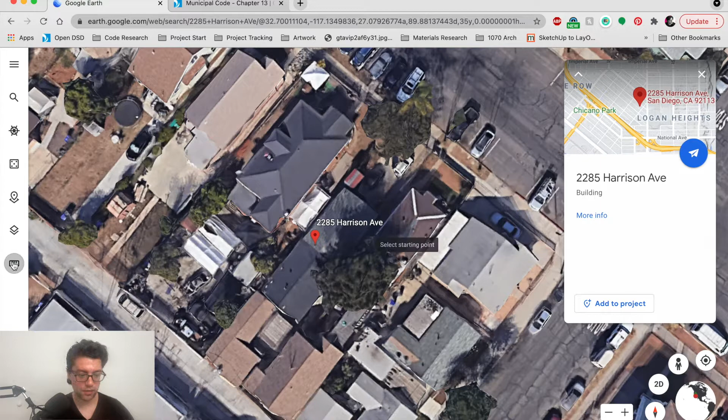First I want to explain the lot conditions that our site has. Our property is located in Southeast San Diego in the Diamond District of Logan Heights. So it's right here on the map. I'm using Google Earth. This is a great tool, because it has this nice little measuring tool, and we can use feet here.

I want to explain a couple things about this lot because it is a little bit of a strange lot. We have a pre-conforming duplex on this lot. This roof right here is Unit A, a 1-bedroom, 1-bathroom unit, which has been completely remodeled in 2016. Unit B is right here, built in 1985, a 2-bedroom, 1-bathroom unit, which has also been remodeled. But the unit in the back here is not my property.

Our lot was subdivided from this larger lot. Our lot extends 100 feet and 25 feet in this direction. So it's a rectangle, but it does not include this back 40 feet right here. This part of the lot here is owned by our neighbor who owns this entire L-shaped lot right here.

Because our lot does not have alley access like all these other lots do, we are one of the only houses on the block which have a curb cut for a driveway. So all of our parking is handled right here in the front. The other thing you'll notice is that all of these homes are set back further or set back less from the street than our home.

Our home is all the way back here, but all these other homes kind of follow this line across here. That means we have this extra space here, and that's where I wanted to position the accessory dwelling unit. Our lot is a total of 2,500 square feet, and the ultimate goal here was to get 3 units in that 2,500 square feet.

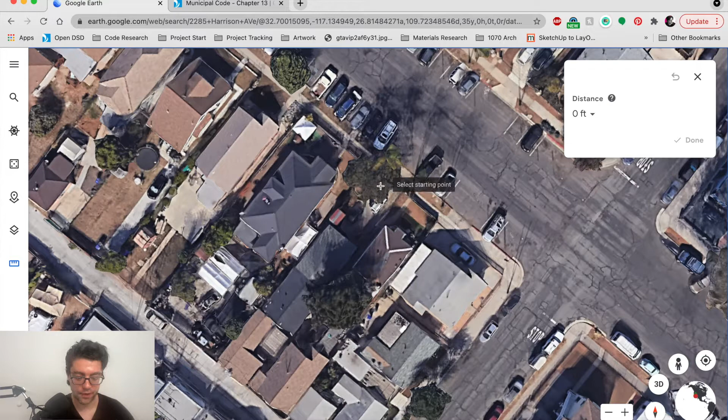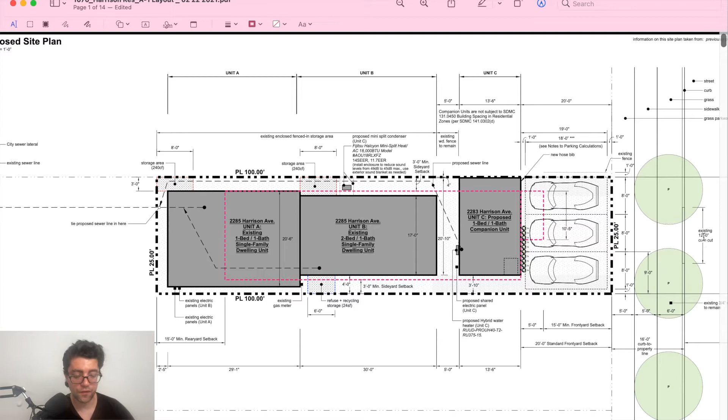You can see that this is the street over here, and we have indicated an existing 12-foot curb cut, so that's how we get into the driveway. You can also see back here is the alley, and our sewer line comes through our neighbor's property and then reaches the alley.

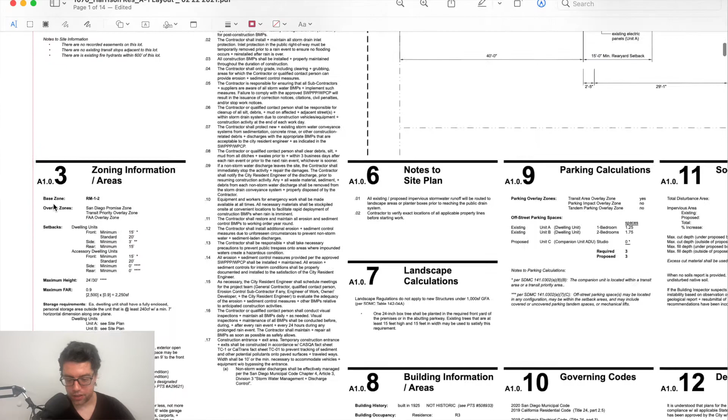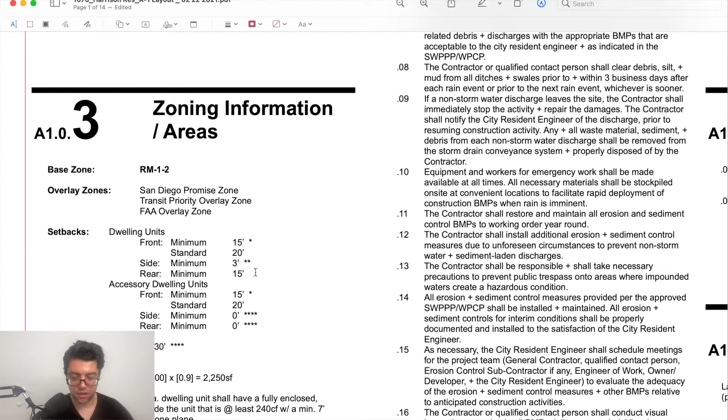Now for setbacks, we have this little section on our cover sheet where we talk about all of our setbacks. Our dwelling units have a front minimum setback of 15 feet and a standard setback of 20 feet. The side setbacks are 3 and the rear setback is 15. If I go back to the site plan over here, you could see this magenta line indicates those setbacks. We have a 3-foot side yard setback, indicated right here, and a 15-foot rear yard setback, indicated right here.

I'll talk about the front setbacks in a minute, but you'll notice that this back unit encroaches quite a bit into this 15-foot minimum rear setback. This is considered a pre-conforming condition, and when we propose this accessory dwelling unit, we're not going to be responsible to correct that setback. This home was actually built in 1925, before the lot was subdivided, and before any of these setbacks were in place.

Unit B actually respects the setbacks quite a bit more, and this is stepped back about 4 feet from the property line. The reason that there's a front standard setback and a minimum setback is because this is how that's applied to the lot. Your minimum setback can be 15 feet from your property line, and that's allowed to be the width of half the distance of your structure.

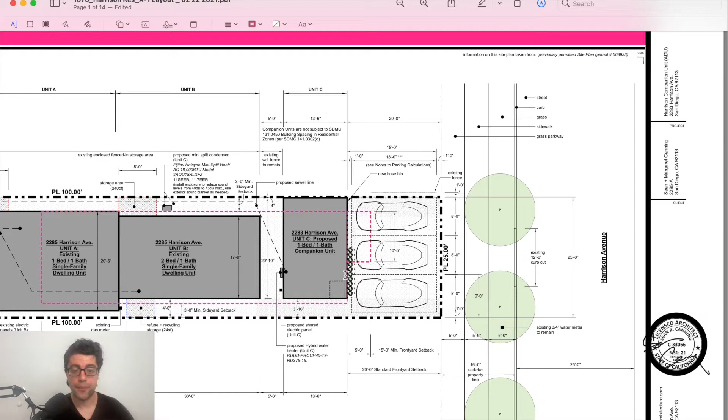Now, we chose not to build in this setback because we had to make sure that we were able to keep these 3 parking spaces. Why do I have to keep these 3 parking spaces? Well, not only is parking a nice amenity for any renter, or for any owner for that matter, but the city has a requirement for parking for dwelling units. And we have 2 units, Unit A and Unit B.

Unit B is a 2-bedroom, so it requires 1.75 parking spaces. Unit A is the 1-bedroom, so that requires 1.25 parking spaces. So in total, we're required to have 3 parking spaces here.

What about the parking for the accessory dwelling unit? Well, accessory dwelling units require 0 parking. You may see the term companion unit in this set, and that's because we made this submittal when the City of San Diego was still using both terms interchangeably. Currently, they only use accessory dwelling unit and junior accessory dwelling unit, so you will not see the term companion unit anymore in San Diego.

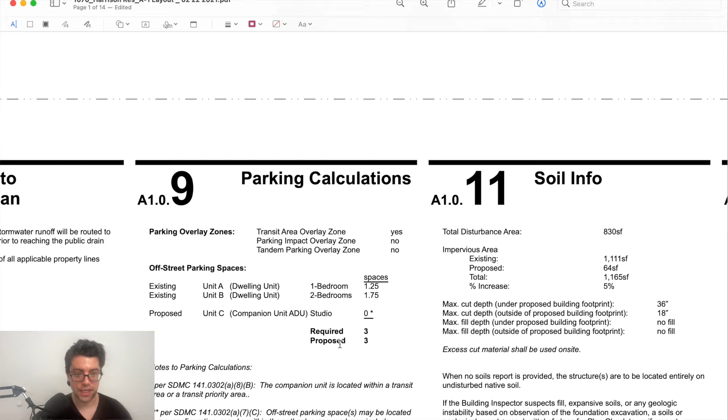Unit C does not require a parking space, but these 3 are required to verify Unit A and Unit B. If I can't get 3 parking spaces here, the city is going to tell me I can't build this. So it's very important to plan ahead for this.

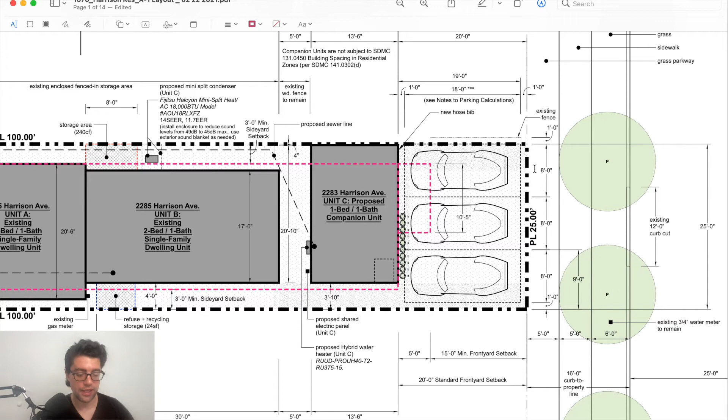A couple other things about parking you need to understand: there is a minimum width and length dimension. So even if you have a Fiat, like I do, you still need to provide an 8-foot wide by 18-foot long parking space. In certain cases, you actually have to provide an additional foot if you have an existing fence or you're going to park adjacent to a structure. And if you park in a garage, you also need to add an additional foot to the length.

One more thing about parking: previously, before we proposed this, all of our parking was shown in the front here. We know that because we have the permit set of drawings submitted for Unit B when it was built in 1985. What I think happened is that Unit B is set so far back because they couldn't park in the front yard setback under the previous municipal code regulations. So all of the parking had to occur here, which is the way it was drawn on the site plan.

If you're not building an accessory dwelling unit, you still need to provide parking over here. You're not allowed to park in the front yard setback. However, once you build an accessory dwelling unit or a junior accessory dwelling unit, you're now allowed to park in the front yard setback. So that's the condition we have here. 2 years ago we wouldn't have been able to do this, but now the municipal code has changed to allow for easier parking regulation to add more housing to San Diego.

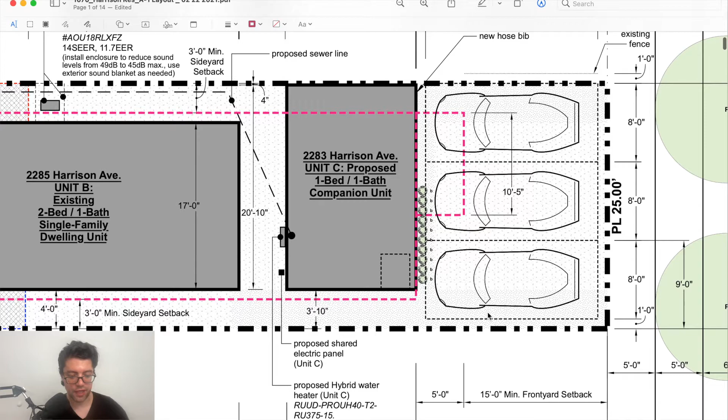The second thing we want to do before we plan the location of this: we know we're limited to the front yard setback, but we can encroach into the side yard setbacks like we have shown here. However, we're not showing it here, and there's an important reason for that - we have to consider how all of our tenants or tenants' guests are going to access these units.

Unit A's entrance is here on this side, and Unit B's entrance is right here in the front. So what we're planning is that all of the tenants would park here and enter through a side yard, just the way Unit A is entered now, same way Unit B is entered now, but it would come down in here, and then Unit C would enter from the side right in here.

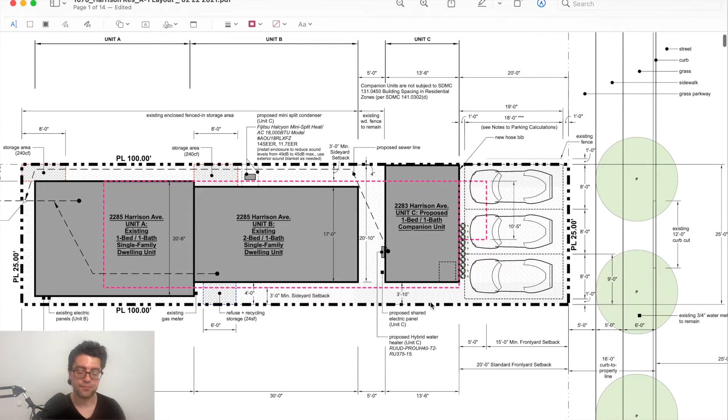This preserves all of our parking, and we just have to leave a little bit of space here so that we can bring in furniture for a tenant, or maybe replace a refrigerator or a washer dryer in the future. So you really want to leave at least 3-foot clearance, and that's 3 feet 10 inches from the property line. If you build a fence, it's going to be a little bit more narrow, so the absolute minimum you want for this passage is 3 feet.

Okay, let's jump into this design here. So just to orient you guys, this is my street, the alley is back here. This is Unit A, this is Unit B, and this is the footprint where we're planning Unit C.

Now, if we keep Unit C detached, we're going to have an easier time permitting this. If we were to attach this, it would create a triplex, and a triplex structure would bump you into an R2 occupancy classification, which could trigger mechanical, electrical, and plumbing engineering. We didn't want to do that because we wanted to really keep the cost low.

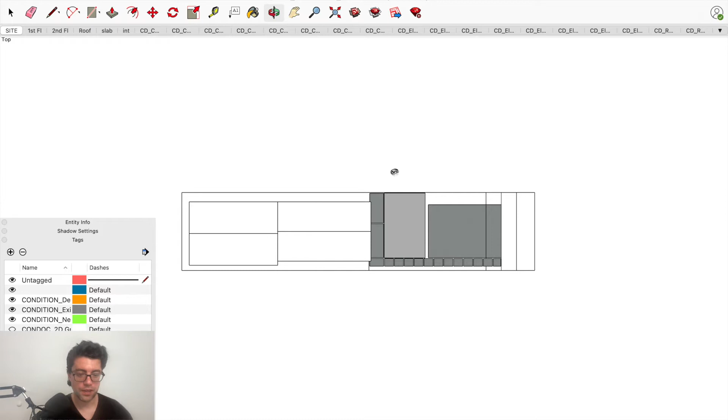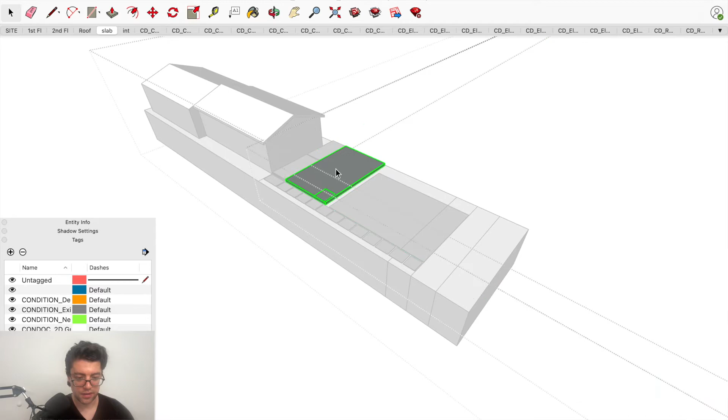So what you're seeing here is the driveway, the walkway we just discussed, and 2 patio slabs - one for Unit C and one for Unit B, which they're going to use to enter here. This is the entranceway for Unit C, and this is also the footprint for Unit C. If I click into this, you can see that's the footprint, and that's where we're going to locate everything.

So the width we have to work with here is just about 13.5 feet by about 21 feet, just under 21 feet. So 13.5 by 20 feet 10 inches is the actual finished exterior wall to finished exterior wall dimension, if you're considering this model for your own property.

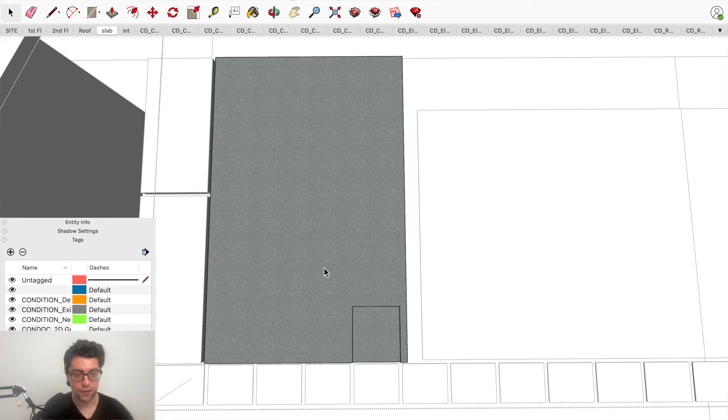Okay, so I'm going to turn this back on. Here's a slab.

I should mention, why would I build a slab instead of a raised foundation? There's pros and cons to both. I prefer the slab because it doesn't have an unventilated crawl space.

If you have a crawl space, your first floor is going to be up a little higher, requiring more stairs to enter the unit. In a heavy rainstorm that may be beneficial, but when space is very limited, we're going to build this slab about 8 inches above finished grade. That should be enough to prevent precipitation from getting in, but it also means I don't have to have more than one step to enter the unit. And clearly we just don't have the space for some sort of porch entry.

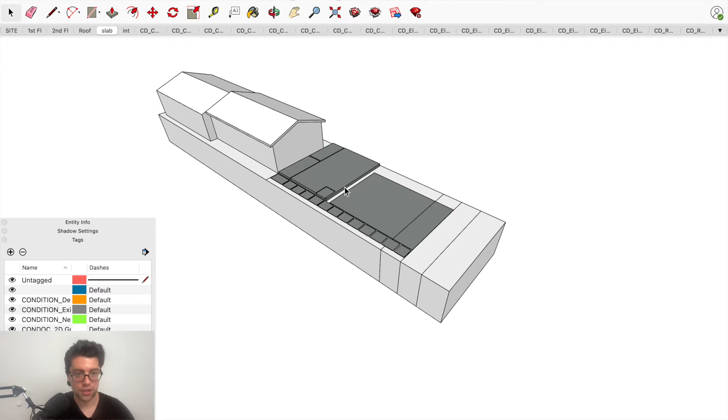Okay, I'm going to turn on the first floor. This is a 2-floor structure, so we did plan to go 2 floors. The first decision we had to make was where the bedroom and bathroom were going to be in relationship to the kitchen and living room. The bedroom and bathroom are considered private spaces, and the kitchen and living room are considered public spaces.

The bathroom is kind of a hybrid, because your guests will use the bathroom. A good way to consider this is if you were to have a party, the public spaces would be where you'd want your guests to be, and the private spaces would be areas of your home where you'd find it very strange to find a guest. So the bathroom kind of serves both purposes, public and private.

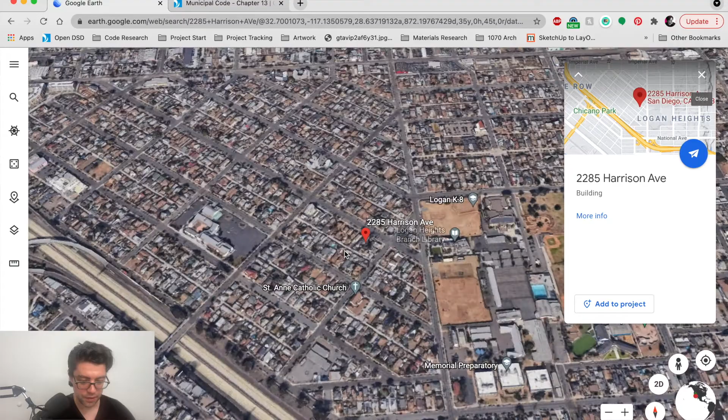So we do have a couple interesting conditions on the site. For one, we have this amazing view of the bridge if we can get up onto the second floor. We know this because we've been climbing on our roof to verify that we can get that view. And sure enough, we are able to get that view as long as we can get up to the second floor. So that was one of the conditions we really wanted to meet here.

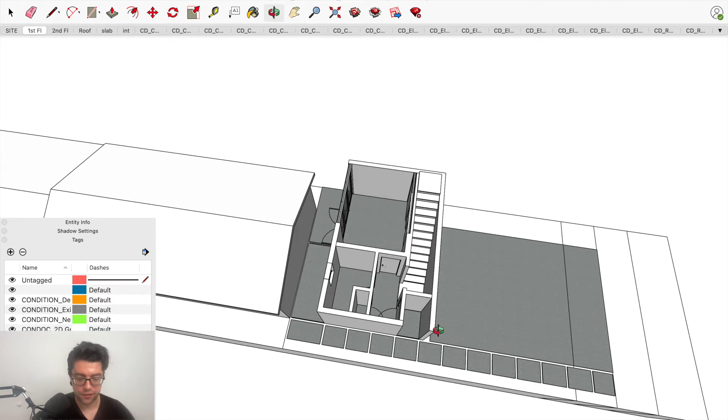The second condition is we're going to have this entry here because we've already established this is the most efficient path to access these units. That path should generally be a straight line. Anytime you're going to have an L shape, it's going to be a little less efficient. We do have a little bit of an L here, but anytime you can get this in a straight line, that's preferred.

So the next thing to consider was once we enter into this little foyer space, you want to be able to take your guests to the living room as fast as possible because you want an efficient floor plan to fit in something this size. We are about 550 square feet total across both floors here.

So this is the bathroom right here, and this is the bedroom. The reason we decided to put the bedroom on the ground floor, there's really 2 reasons. First, we wanted to preserve the view for the public spaces so that guests can experience the Coronado Bridge at night when it's lit up. It really looks beautiful from our living room.

The other decision was because we wanted to put the bedroom and the bathroom on the same floor. I think this is the most important decision we made, because in the middle of the night, if you have to use the bathroom, you don't want to walk up or down a flight of stairs. So that was very important.

Okay, so we do have the bedroom here, we have a closet under the stairs, and we have the stairs in the front of the home. The reason we did that is because as people pull in to park their cars, they're going to have their headlights on and they're going to be slamming their doors. So we wanted to create as much buffer from the bedroom and the living room space as possible. That's why we located everything here.

The bedroom width is basically 9 feet wide. This is the absolute minimum I would design a bedroom in a 1-bedroom home. This is just big enough to fit a full-size bed on this wall and have about 18 to 24 inches to circulate around the bed. So I don't think I would go any smaller than 9 feet.

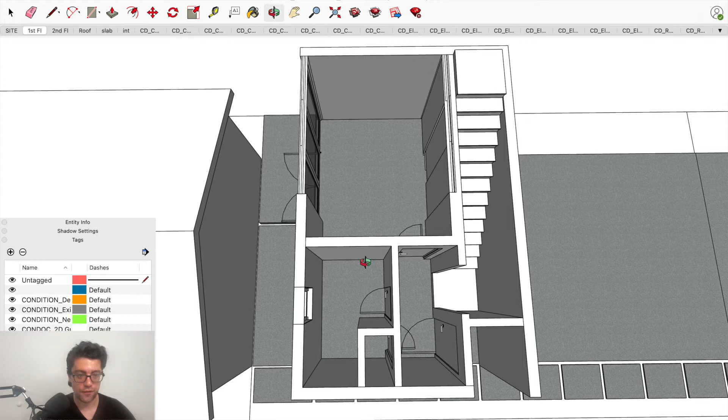This is just about the smallest bathroom you can design. We have a 36 by 36 inch shower. We have a toilet which requires 2 foot 10 inches of clearance space, and then we have a 24-inch floating sink vanity. We also ran our medicine cabinets all the way across the wall to give ourselves some additional storage space.

The last thing I'll mention is we have this coat closet over here, so you can put your shoes or take your visitors' jackets and put them in that closet. We'll also probably store our vacuum cleaner in this closet.

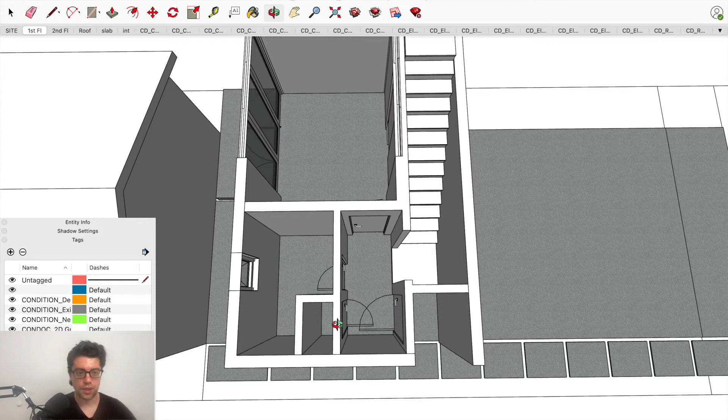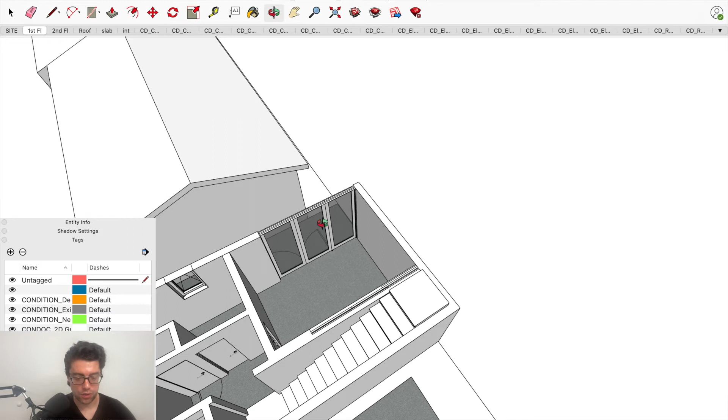And the bedroom is positioned so it has a private patio right here. Both of these doors open, and this door is fixed, so that's a 9-foot wide by 8-foot tall door. This is one of the more expensive components in the project, and if I was going to value engineer this, I would probably reduce this to a 6-foot wide sliding door system.

This door system cost us about $5,500, and the total budget for the project is about $130,000, so it was one of the larger items we splurged on. The nice thing about this door system is we have that full 9 feet in width, and the clear opening is just about 6 feet because both of these French doors open.

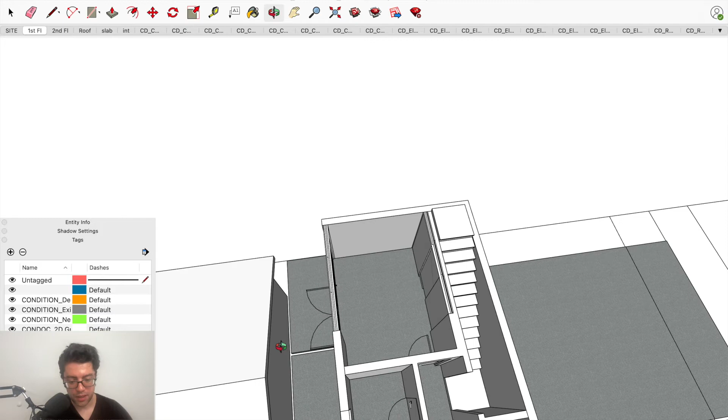By the way, this patio is going to have a fence around it, so it will be completely private from the entry for this unit, which is very important. We also have a washer dryer planned under the stairs over here, so this is kind of an upgraded unit.

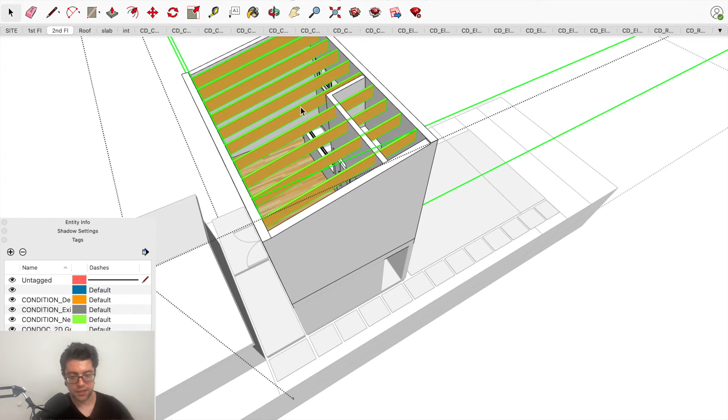Okay, here's the second floor. One of the things you'll notice across the board in the 1070 architecture portfolio is we really stress ceiling heights, and this unit is no different.

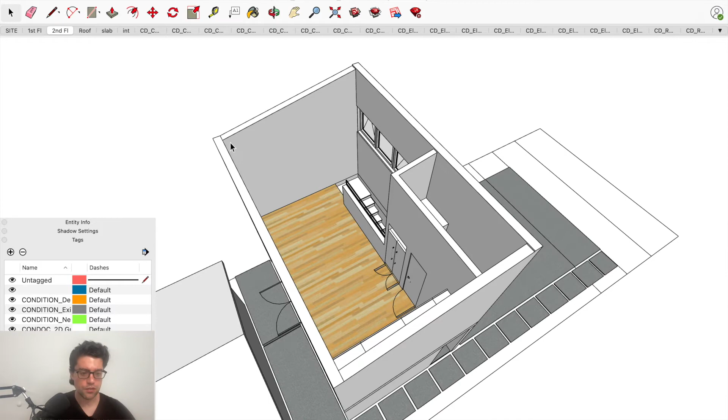I'm just going to hide this real quick. We have about 12 feet 6 inches to the peak here, and then the ceiling slopes back this way because it's considered a shed roof, which means it only slopes in one direction. It's a very simple roof to build, and you're going to experience that slope from the inside.

On the second floor, we have our living room space, and then we have a very small kitchen space here, and in between would be a dining table. Our thought is that the tenants would bring their own dining table, and they would be able to use that as an additional surface to prep food.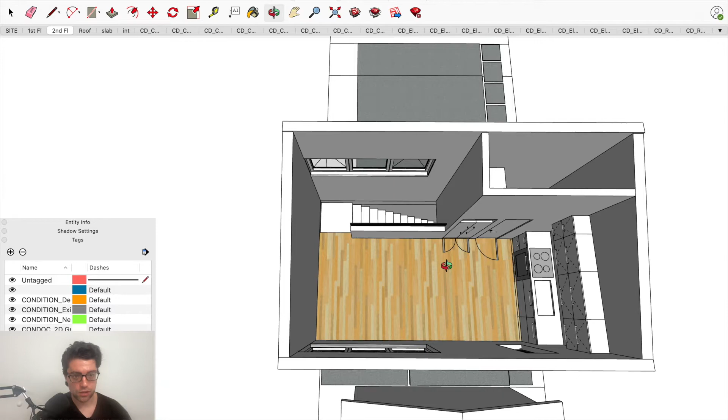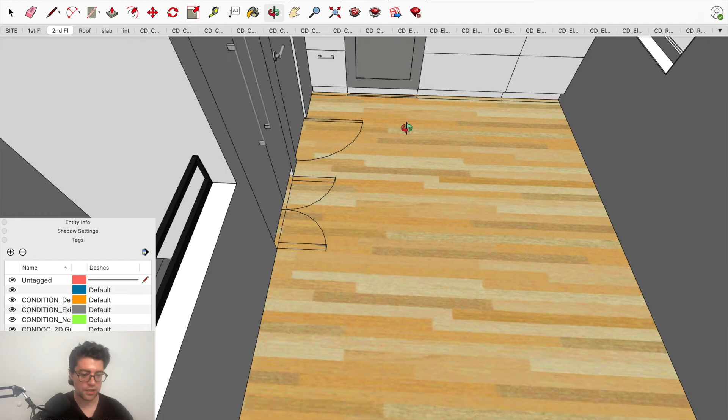This pantry over here has gone through a couple changes since we've created this design. Originally it was just supposed to be a pantry for food and dry storage and things like that. But as we were building this in construction, we actually decided to take a cabinet and countertop and extend it over to this area, so that will serve as kind of like a mini butler's kitchen, maybe somewhere between an appliance garage and a butler's pantry.

You'll be able to store your blender and toaster on the countertop over here. It'll be already plugged in, and you can use it in here, so you don't clutter your countertop over here. We're also going to have some shelving all the way up to the top, and the top shelf will be a router shelf because we're going to have some security cameras in the corner on the outside over here.

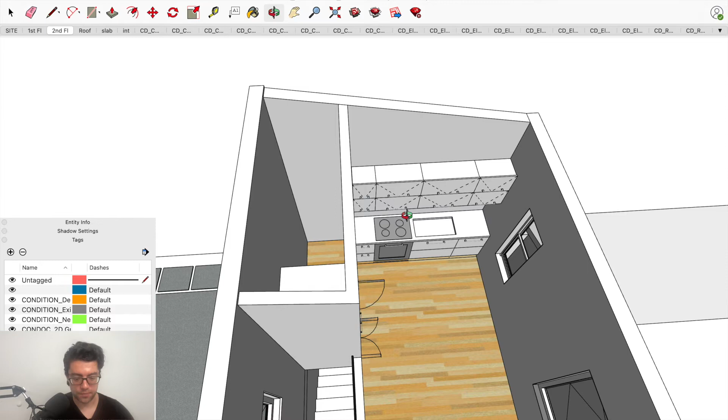It is a small unit, so storage is a huge advantage to have. On top of this refrigerator enclosure, there's going to be additional storage on here - that's the stuff that you would generally store in your attic if you had an attic.

So that's the second floor. I just want to talk about some of the windows here while we're at it. This is the window which is going to look towards the Coronado Bridge, and that's a nice casement, fixed casement window, so these swing open like a door would, and that's a great way to sort of catch some of the breeze off the bay and cool down the interior space.

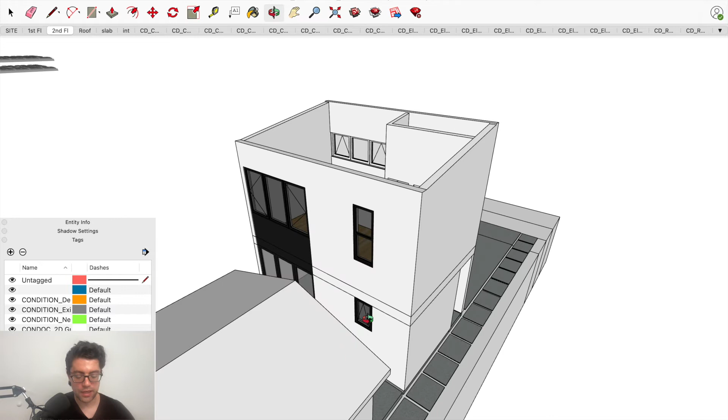Down in the bathroom we have an awning window, so this opens like an awning from the bottom up, and it doesn't encroach into this little entry patio for unit B too much, so that's why we went with an awning window. And that has privacy glass on it, so most of the time it will probably stay closed and you can't see through the privacy glass, so people in that bathroom will have privacy from unit B.

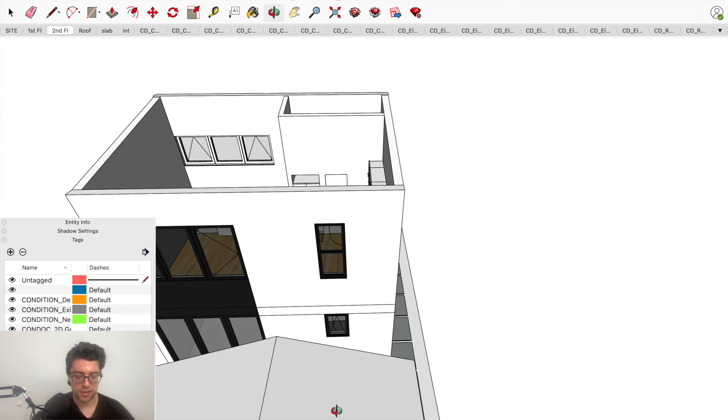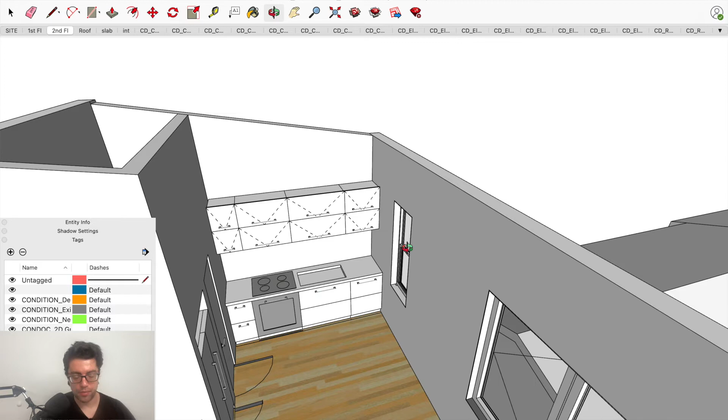This is a double hung window. I really like the function of a double hung window because you can pull the top sash down and sort of exhaust some stale air or some cooking smell, and since it's so close to the kitchen, I think that makes a lot of sense. You can also open the bottom sash and get a bunch of air in there, and you can open both at the same time if you wanted to create a circulation loop.

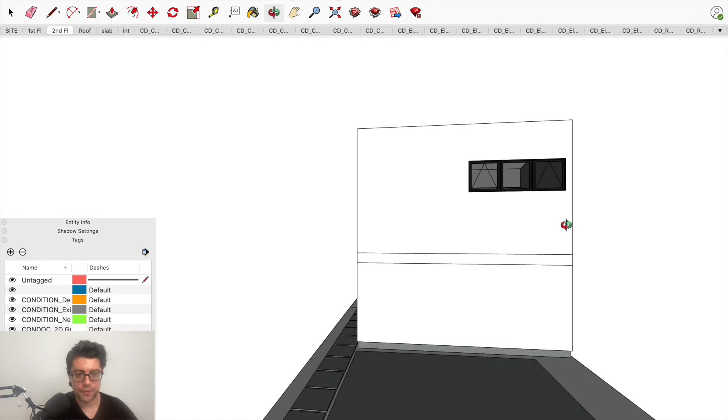And then this window in the front here, now we were required by code. Our goal was to create a very minimalist front aesthetic. We were required by code to have one window in the front. I don't like it when the code requires things like this, but we were able to satisfy that requirement with this large window here. So this would count as like 3 windows.

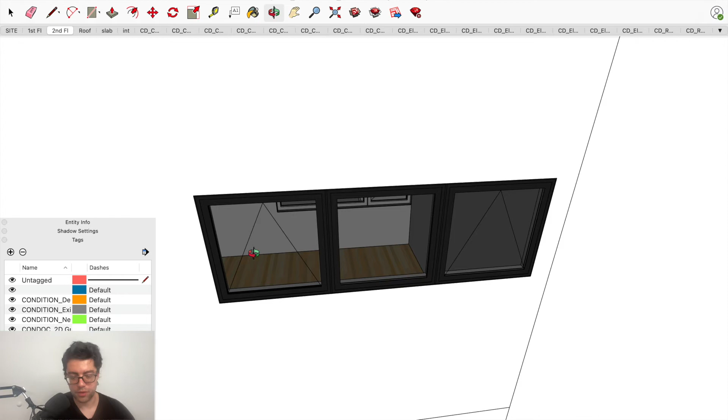It's 9 foot wide, just like all the other windows here and here, that door system, all 9 foot wide. This awning's open, and this one awning's open, although you'd never really be able to reach this window. And this is a fixed window. But you can stand on the last landing of the stairs here and just about reach the crank on this one and open that up.

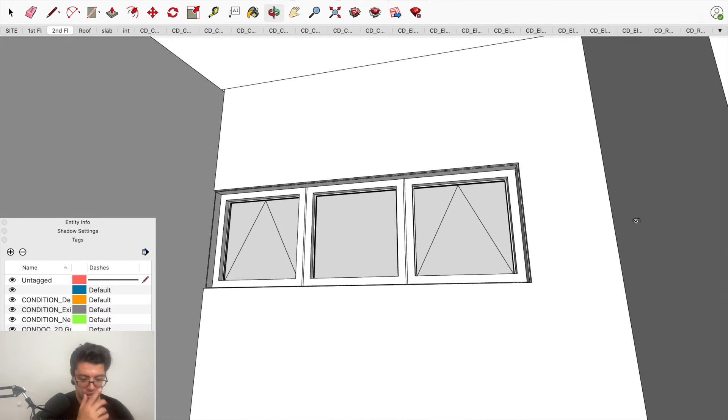This window is positioned strategically higher than all the other windows, and I just want to show you why. So if you're down in this room, you're going to be looking at this window from this perspective. And from this perspective, you're going to see the sky and palm trees, but you're not going to see the street and you're not going to see the driveway. So this was an intentional move because we realized that the relationship between the driveway and the interior of the space is very important to address.

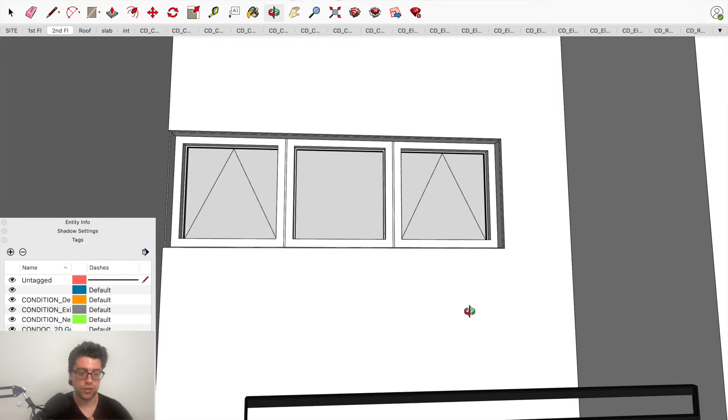If the tenant from unit A comes and pulls their car in and slams their car door shut, you don't want those headlights coming into your unit and interrupting you watching a movie. So this is why this is set higher than normal.

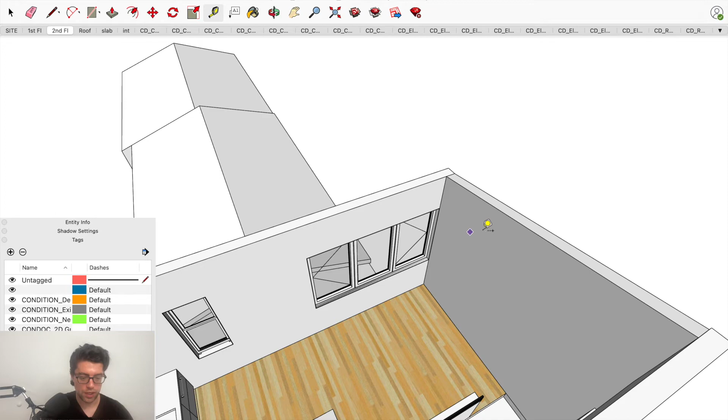All these windows, by the way, are set at 8 foot head heights. So we're at 8 feet here. This is a full 1 foot 4 inches higher than your standard head height. By doing this, it extends the room upward and makes it feel bigger. We've also pushed most of the windows to the edge of the wall, which helps dissolve the wall from the exterior space, so it makes it look like the window is not just a hole punched in an exterior wall, but more like part of the design.

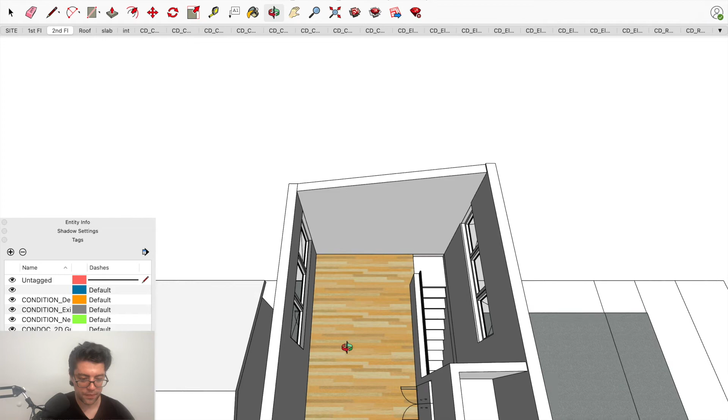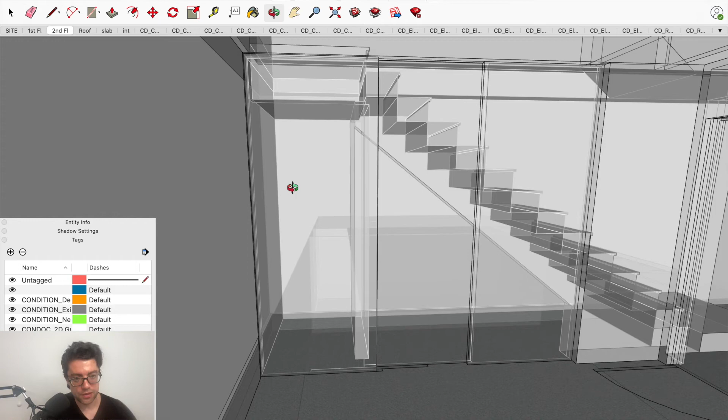We also have a symmetry going on here with this 9 foot door system, and here we have that 9 foot window system and another 9 foot window system, and below we have a 9 foot door system, and behind this we actually have a 9 foot closet system which opens to the space below the stairs. So the stairs run up here, you can see that. And here's our washer dryer. So in terms of the relationship between the parking, which is out here, and the bedroom, this stair and closet space actually serves as a great acoustical buffer from the bedroom. That was really another smart decision we had to make early on in the project.

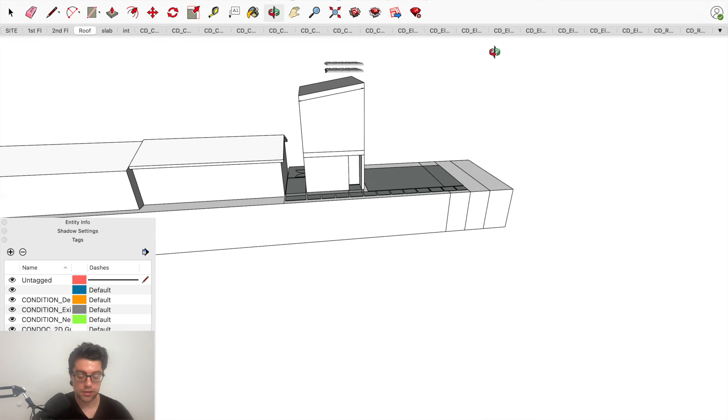Let's see what else we can talk about here. I'm going to turn the roof on. Okay, so these new ADUs are required to have solar panels, so we wanted to plan ahead for that. This was the ideal orientation for solar, so we sloped the entire roof like this. We did this primarily for the solar orientation, but as a secondary reason, it's a very easy roof to assemble, and also we wanted the front appearance to look more like a flat roof, but we didn't have the budget for the flat roof.

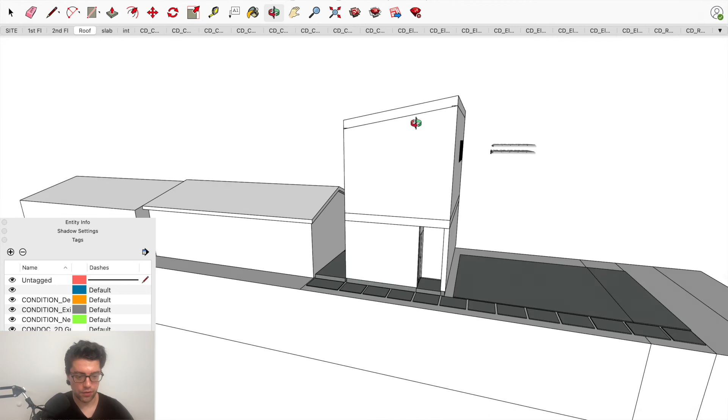So we went with, this is considered a shed roof. From the side it looks like this, but when you see it from the front, it looks kind of square. Now this roof will have a gutter, and that gutter will run along here, so all the water from the roof will drain into that gutter. It'll come down a leader down the side here, and kick out into the front yard where we're gonna have a little bit of landscaping over here.

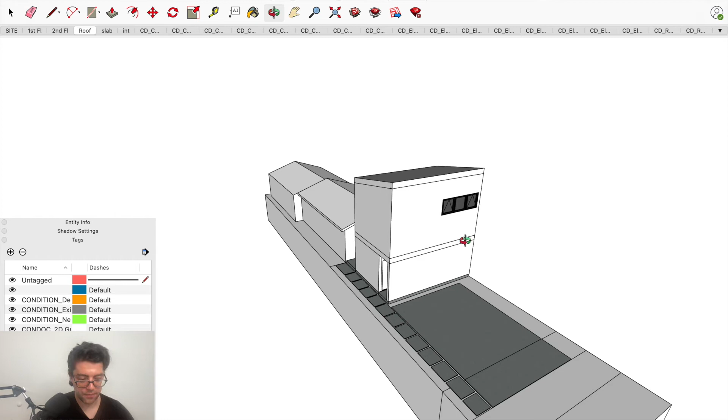This is all getting stuccoed. Actually, this week it's getting stuccoed, and it's going to have a nice white stucco with a little black accent here, which helps align the windows to the door system below.

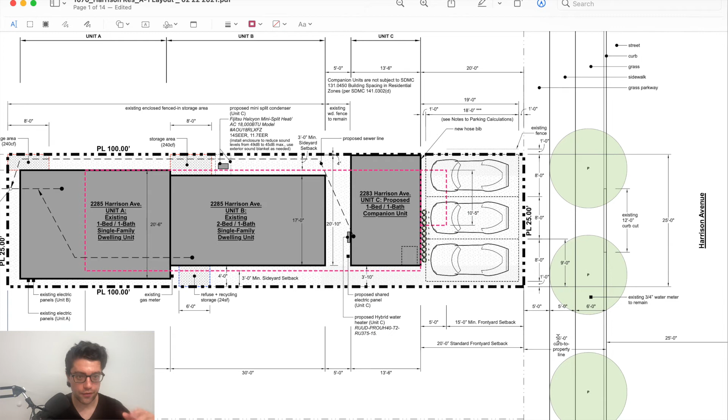Okay, let's see if there's anything else I should mention. So we did talk about the front yard setback, and that's what this pink line is, but it's also important for you to understand your curb to property line dimension. So this is the edge of the sidewalk, and a lot of people would assume that's their front property line, but in most cases it's actually not. Our property line actually extends 5 feet past that edge of the sidewalk. So in San Diego, you fill out a curb to property line form and send it to the city, and they mail it back with this information. That's where you get that information from.

I just want to wrap up here and show you what a submittal set of drawings looks like to the city. So this is our site plan. This is a requirement for that submittal. We also have to have all of this standard information on there.

These are my standard architectural notes, which get updated almost every project. These are notes that the contractor can refer back to if he has any questions about maximum plumbing fixture flow or things like that. These notes also serve as a good refresher that the contractor should read at the beginning of the project and make sure he's going to meet all these requirements.

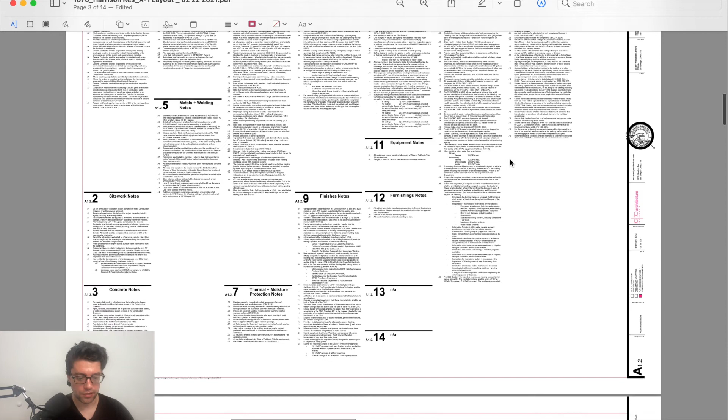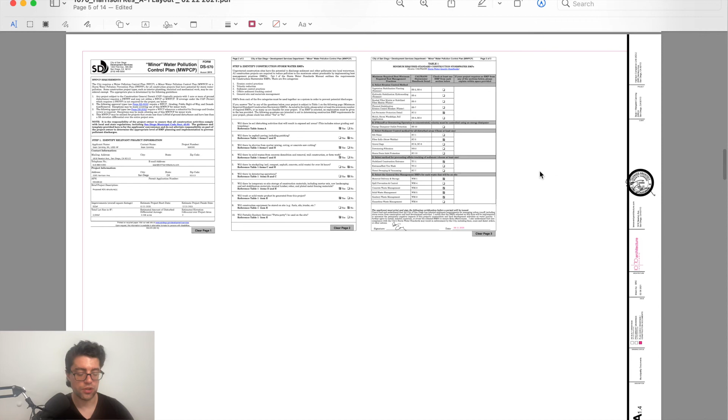These are some stormwater forms and the water meter data card that you have to fill out to permit something like this. And here's a minor water pollution control plan, so that's another form that we have to fill out.

Then we like to provide a really nice construction floor plan. So here's our first floor plan. You can see this is where you would enter, into this foyer, and we have that coat closet, the bathroom over here. We have our bedroom in the back here, and then there's a closet under the stairs.

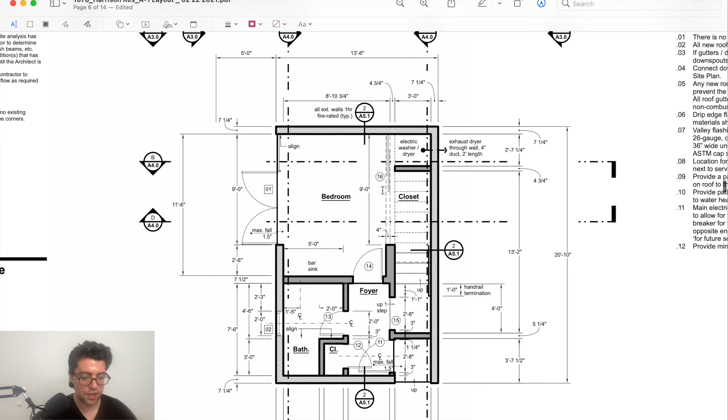Down below we have our second floor plan, so we can see the pantry, the refrigerator, the small kitchen, and the living room space. Then we have window schedules and door schedules, which reference back to some of these numbers for which door and window would get installed there.

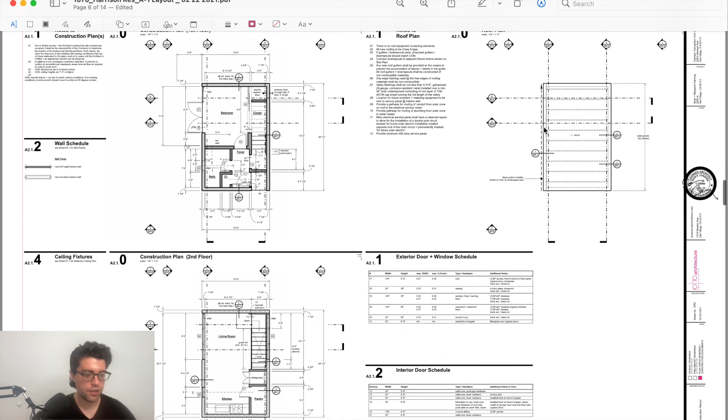Here's a roof plan which shows some of the joists, that gutter detail that we designed. We also have elevations, so you can see it's going to have a very minimalist front elevation. We actually do have a beautiful mural which fits where this dashed line is, and that's going to be mounted, and it basically aligns with the window above. So that's a Prince mural designed by Mario Torero that will get mounted back in the front.

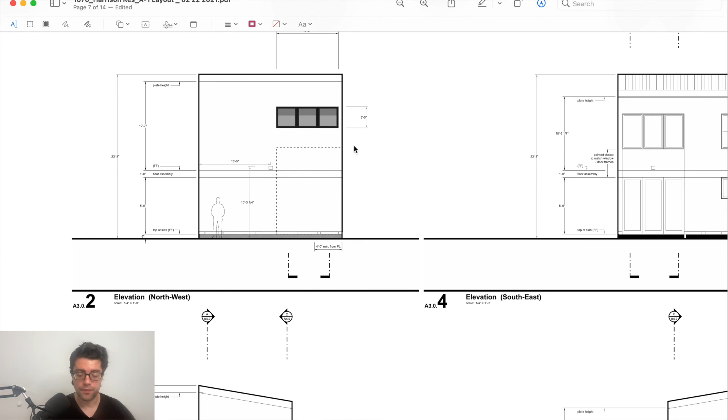We have some side elevations. We have some sections, so these are slices through, so you can see exactly how tall that ceiling is going to be. We got some detailing here, some wall details.

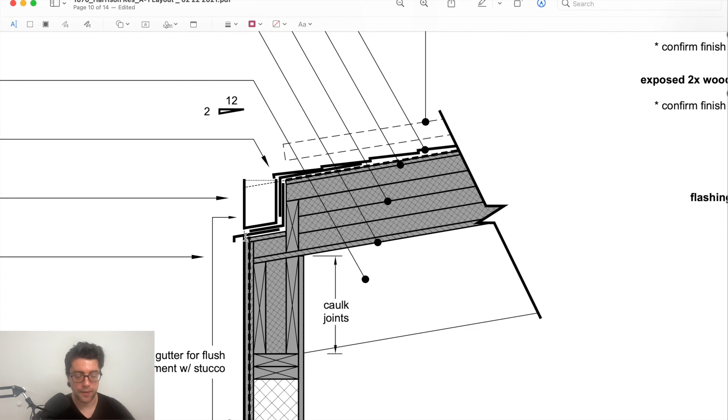You can see this is the gutter detail we created, so it's a very simple gutter, should be low cost, but because we stepped the roof back, we can get a flush condition with this gutter. So it's going to create a really nice little detail, still keeping the cost of the project reasonable.

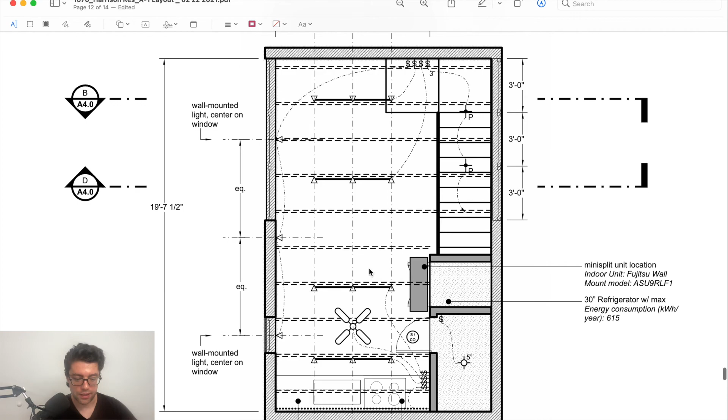We also have some floor assembly details, and on this particular project we provided our own electrical plans and lighting plans. For example, this is a plan which shows where all of the lights are going to be mounted on the ceiling and where all of the switching is going to be.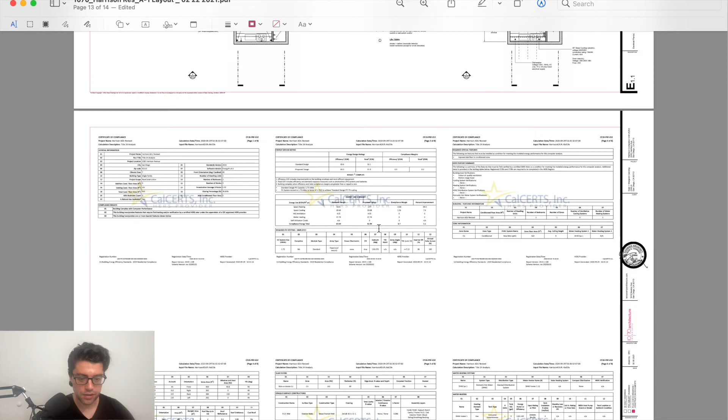This is our Title 24 report. We hire a consultant, and he produces this report just to verify that everything complies. Here it says building complies with computer performance. So we passed.

And then we pair this up with the structural set, which is another 12 pages or so, and we make that submittal to the city.

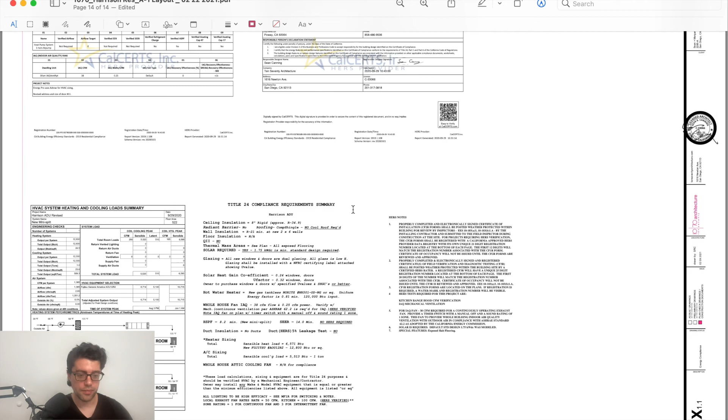Okay, last thing I want to show you, with this software we are able to take a look at the interior. The public space is where we really try to maximize the ceiling height and just get that overwhelming feeling of space. So you will see that Coronado Bridge out in this direction.

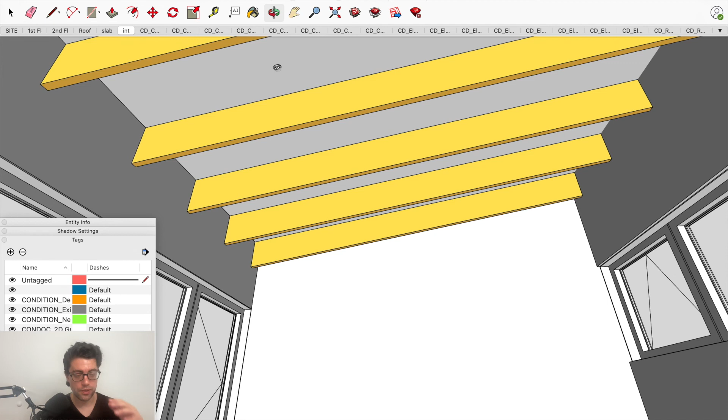We took all of our structural joists and purchased them with architectural grade lumber, so these are all going to be exposed. We're stuccoing right now, so all this is framed and this looks spectacular. Then we put all of our insulation above the joist, so we use a little bit of an atypical detail for the roof assembly.

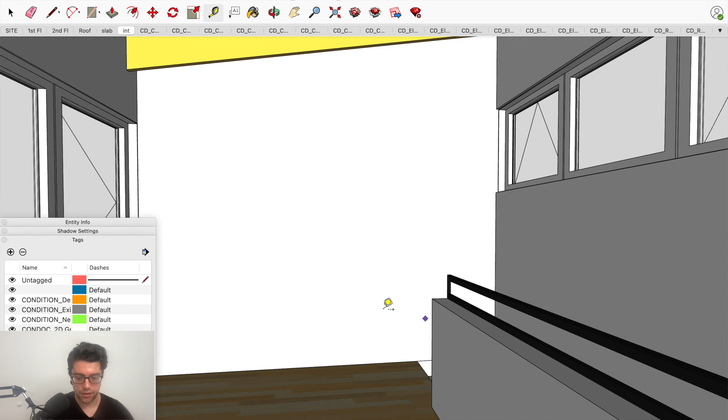You can see we're actually looking past, we're going to look past the stairs. So the space that we actually experience is closer to 12 foot 3.5 than that 9 foot width from here to there. So that's really important.

That pretty much wraps it up. I think that's a pretty good overview of how we go about designing these accessory dwelling units for our clients. We do specialize in permitting these in the city of San Diego. The ADU regulations are in constant flux in San Diego, but we've been leveraging the state code since the beginning of 2020, and we've been sort of forcing the city to acknowledge the state regulations in spite of the municipal code regulations for accessory dwelling units. In November of 2020, the city updated their accessory dwelling unit regulations, and now there's quite a bit of opportunity for these types of lots.